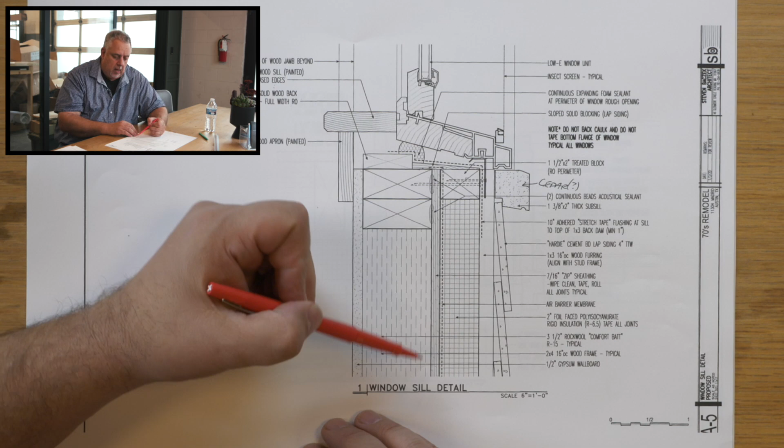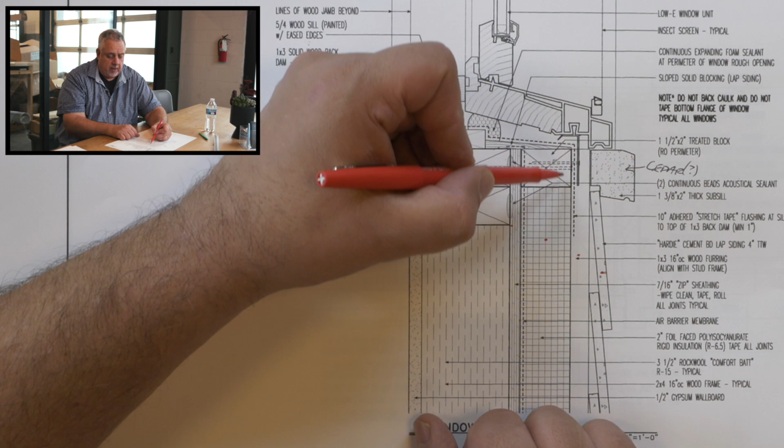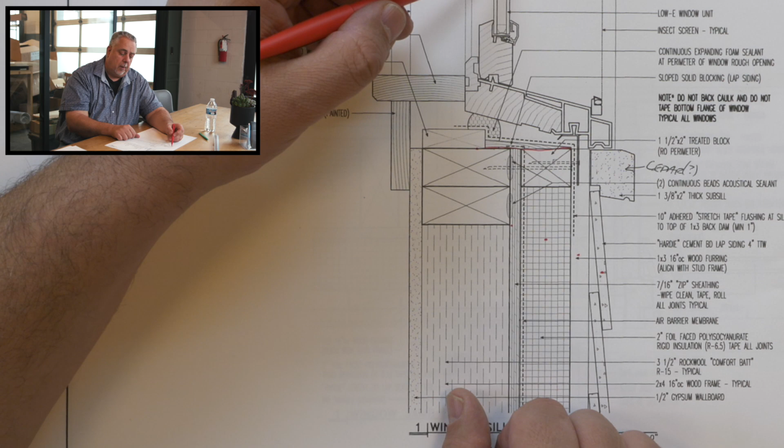From the other video, you notice that we have our ZIP wall, our 2 inches of foam, our airspace, and then our lap siding sitting on the outside of that. Nothing there has changed, but we're now cutting a hole in this wall and puncturing all of that. So for the time being, conceptually, all of our control layers stop there. But we need to connect those control layers from the punctured hole to the window, and do that ankle bone's connected to the knee bone, connected to the hip bone routine, and take those control layers through our window. So let's talk about how we did that.

First thing, as an architect, I've been doing this 27 years. For some that's a long time, for some maybe not, but it is what it is. What I can tell you about drawing details is it takes a while for an architect to get the confidence to understand exactly what they're building, right? So one of the things I pride myself on is I go out to the field and actually install some of these windows with the builder on different projects. I tell them I'll come out and we'll install the first 2 together. Now, you could say I'm doing that to help the builder, but I'm really not. Most of the builders I work with are extremely intelligent people. They're smart, they get it, they figure it out.

It's more about the collaborative effort. I have a certain set of skills, filters, and knowledge. The builder has a certain set of skills, filters, and knowledge. We don't see things exactly the same because we weren't trained to see things exactly the same. But our outcome needs to be exactly the same. So how do we do that? Well, we get all the tools and everything ready, I get out there, and we install a window together and walk through it step by step. Pretty much what I'm going to do right here and now with you guys.

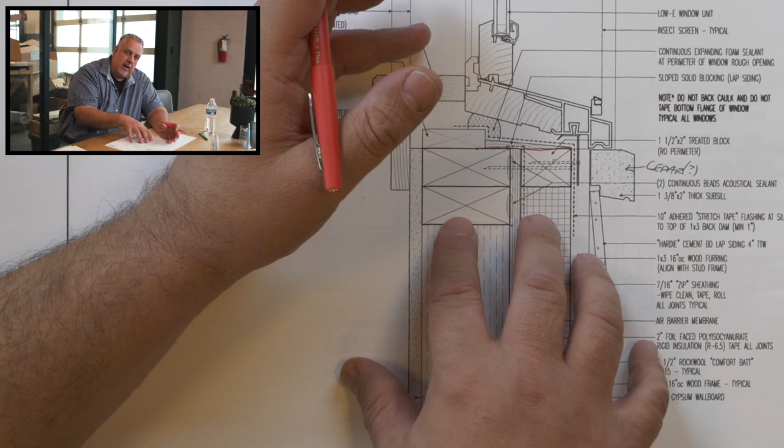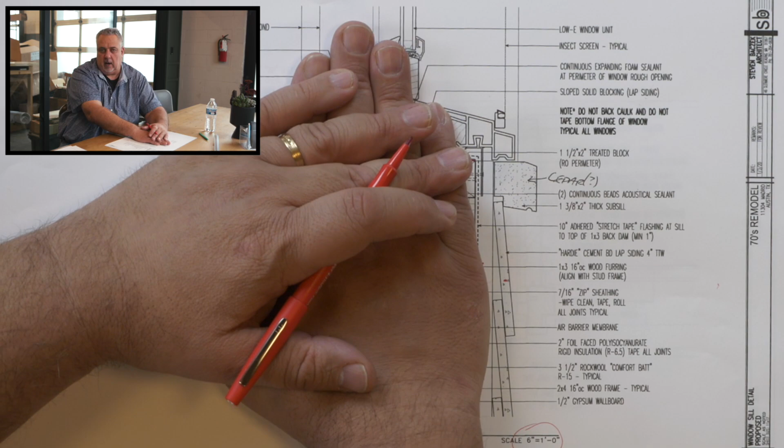Getting back to that one comment, it takes some years before you get the knowledge to be able to develop details. These details are drawn at 6 inches to a foot. That means half full scale, right? So these 2x4s here are 3/4 of an inch by 1 3/4 inches. They're half the size. If I just took this detail and doubled the size, it would be the actual life scale model of what we're doing. When you draw things at a scale of 6 inches, you need to understand all the different components because you get to see them all, right? You can't hide something in that dark line and just say, yeah, that's a piece of flashing, it's in there somewhere. No, you have to have the ability to draw the flashing.

So you need that understanding of what laps what, and how far it laps. I can't ask guys to put in 10 inches of flashing unless I've taken the time to measure and make sure that 10 inches of flashing goes from this point to that point, right? That way, what I'm asking for can be achieved. Imagine that. Drawings have a certain level of intent. Well, that intent needs to match a level of reality that, yeah, we can actually do that, right? So that's the start of a good detail.

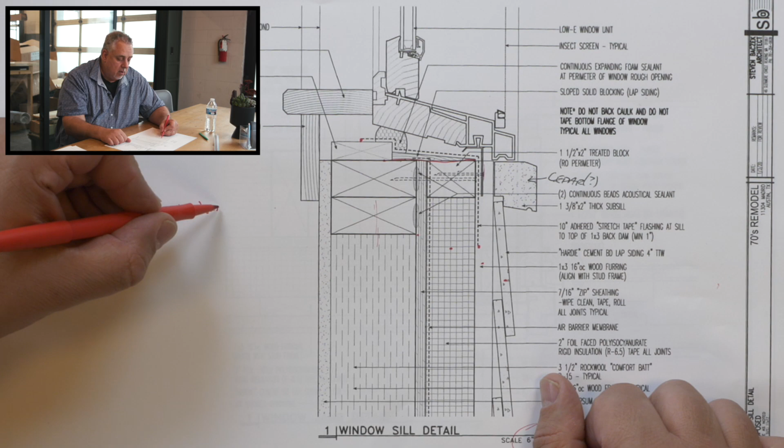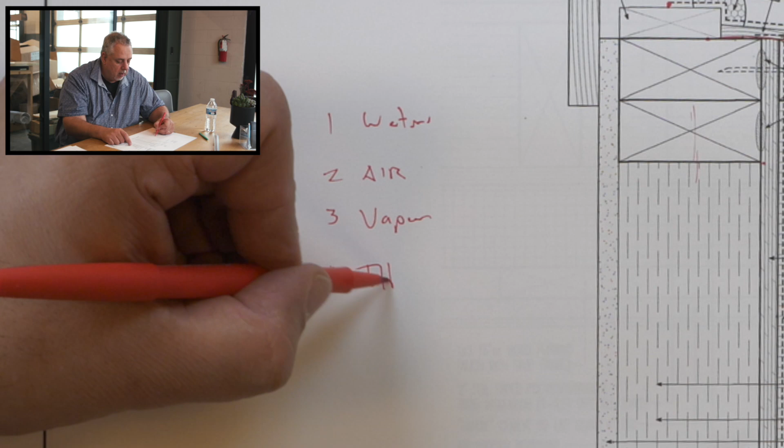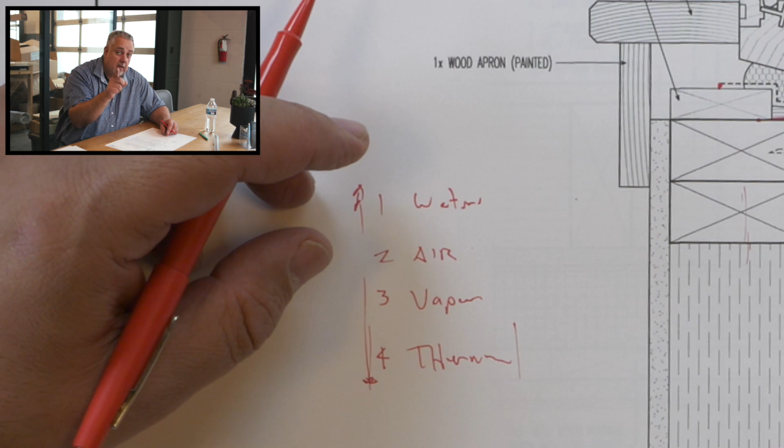Let's dive into this. We talked about those control layers. Again, quick review. 1, water. What are we going to say about water? If it don't last, it don't matter. 2, air. 3, vapor. And 4, thermal. In our order of importance. All right, quick quiz. What's the key about control layers? You guessed it. Continuity.

Is the key. Have to check that and make sure I spelled it right.

Well, wouldn't that be embarrassing, huh? Get caught on film and can't spell? I think I spelled it right. Anyways, just don't look so close.

You get the idea. Continuity is the key. All right, let's dive into these details. So, there's our two sills. We put those in, we bring our sheathing up, we have a couple beads of acoustical sealant here, and then our tape comes up, and then at the top of the zip, we bring a piece of tape that runs along the opening there and just seals off that joint.

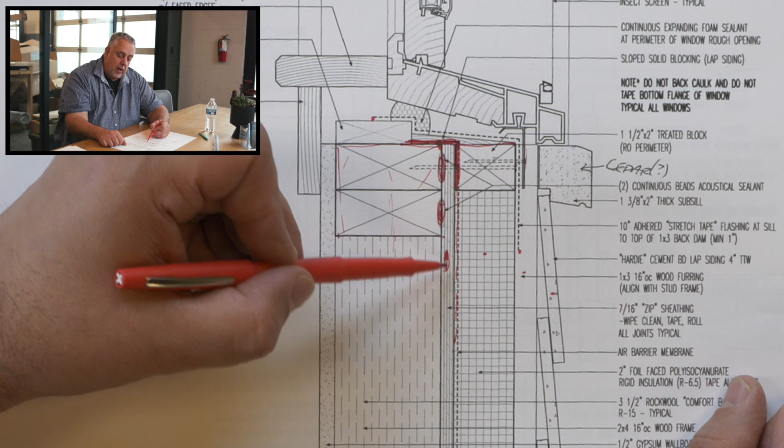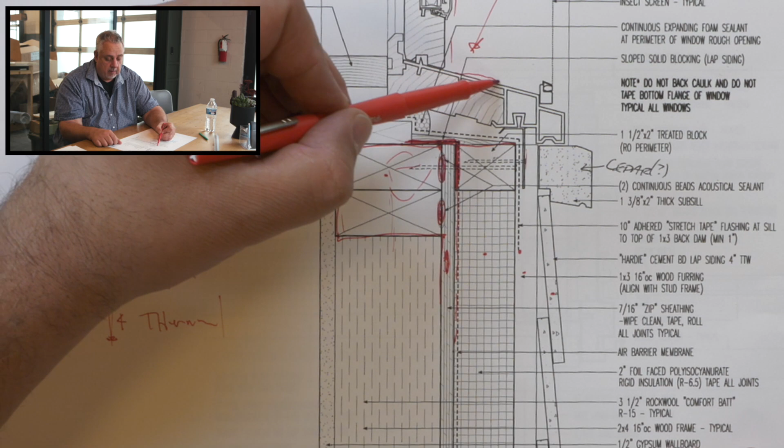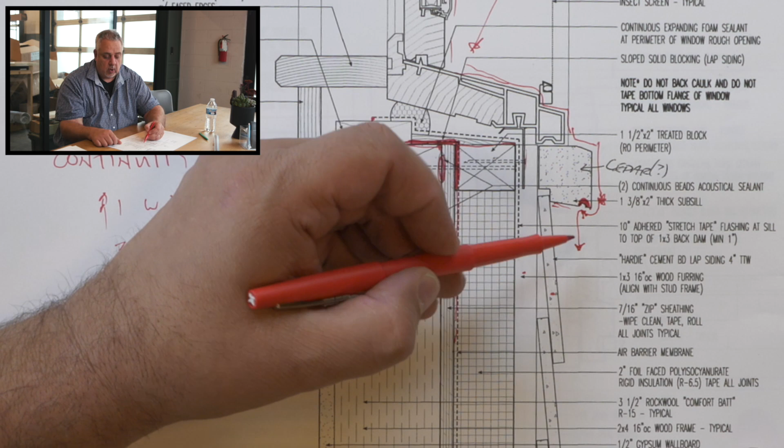Notice the little reglet here. This is a sill that you can purchase off the shelf, has the reglet cut in. That reglet is to stop water from turning the corner and going up. It forces the water to come to a bead and then drip. And it drips down and falls down my siding. Any water that goes up into my siding through capillarity, we have the drainage space inside there.

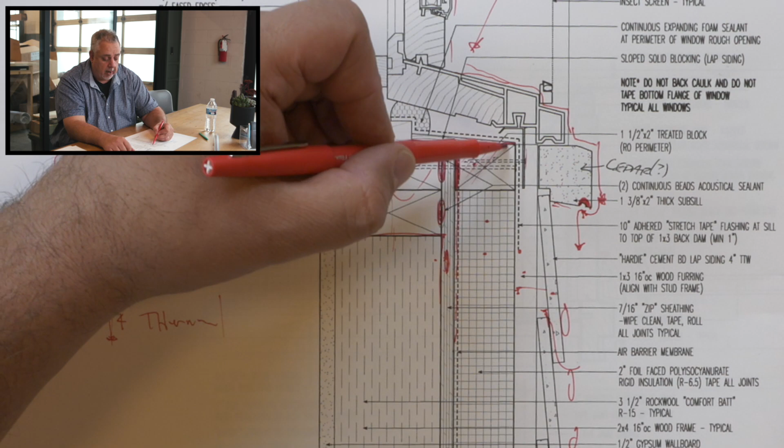So, we're putting the zip wall, we have our 2 inches of rigid insulation, we're adhering that to the wall, attaching that. We need to finish it off. Just like I finished off the bottom of the wall, we're putting a 2x2 buck. We're taking that 2x2 buck and we're screwing it all the way back to that top mud sill. And that finishes it off. It gives me a nice hard surface to now attach my window to.

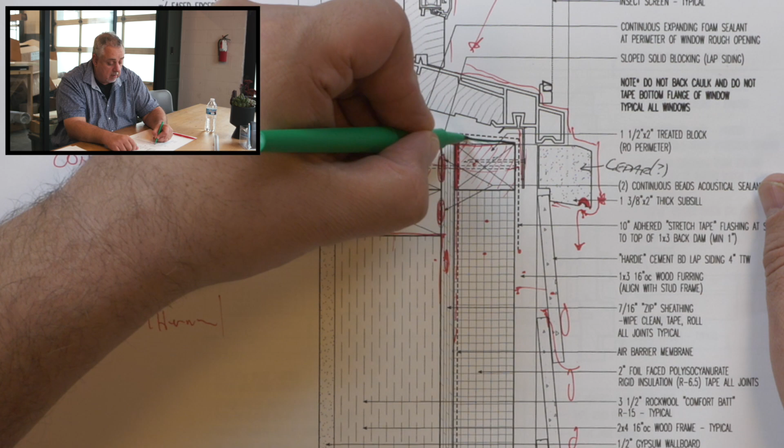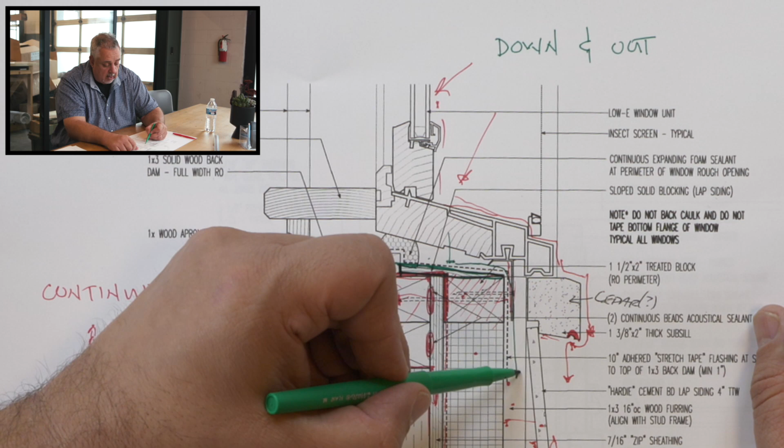On top of the buck, you notice here, we have a little slope piece of lap siding. Remember we talked a little earlier about what's a good strategy for water, and we talked about 2 words, down and out. All right? So if any water migrates into this cavity, it can now bleed and get into our drainage space and bleed out.

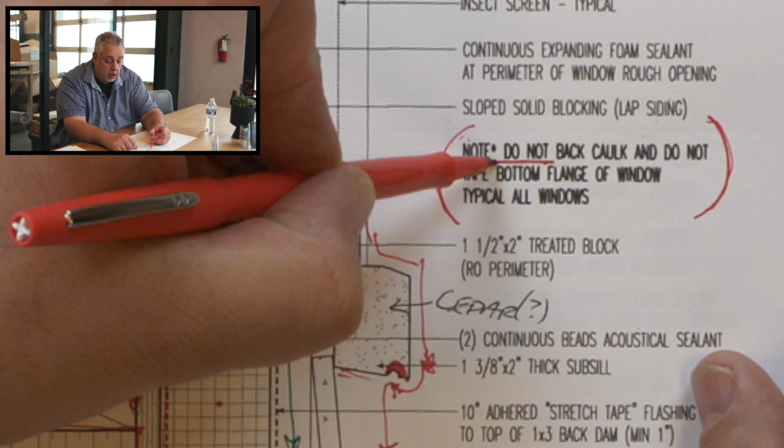Notice that there's no bead of sealant here at the nailing flange. And actually, not only did I omit it, but look what we have here. We have an actual note of what not to do. Do not back caulk and do not tape bottom flange of window. Typical all windows. Why? Because we want to have that ability for any moisture to migrate down into this drainage space and go down and out at the bottom of the wall system.

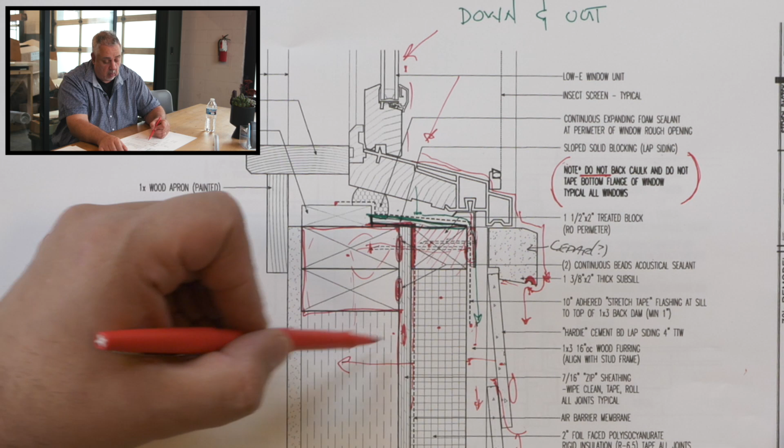So we took care of water there. Air, we talked about the air barrier. Vapor, we talked about that earlier. Our wall dries in this way and it dries out that way and dries down that way and up that way. Thermal, we have our 2 inches of rigid foam. We have the block here. On top of there, we have our slope. We have a piece of stretch tape here. The beauty of zip stretch tape is it has the ability to contour to surfaces.

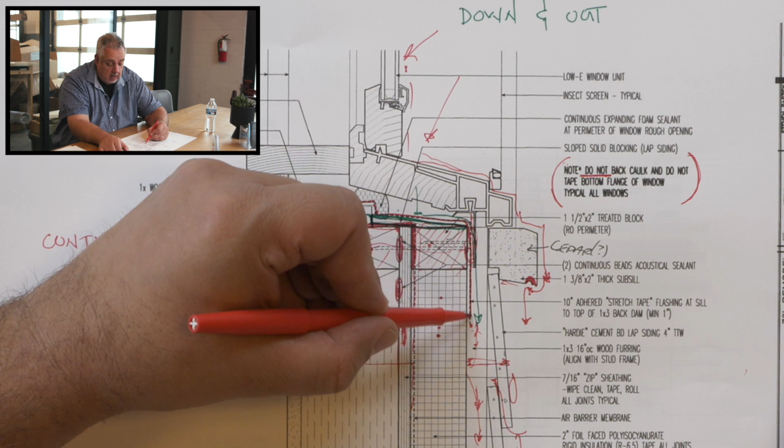So, doing this little song and dance on what I'm calling a 1x3 back dam here, right here, solid wood back dam, full width of the RO. What that suggests is any water that comes in, not only do I have a slope pushing it that way, if this wasn't sloped very well, it meets this back dam here, so water can't migrate up into the system any further. It has to fall and move out of the system that way.

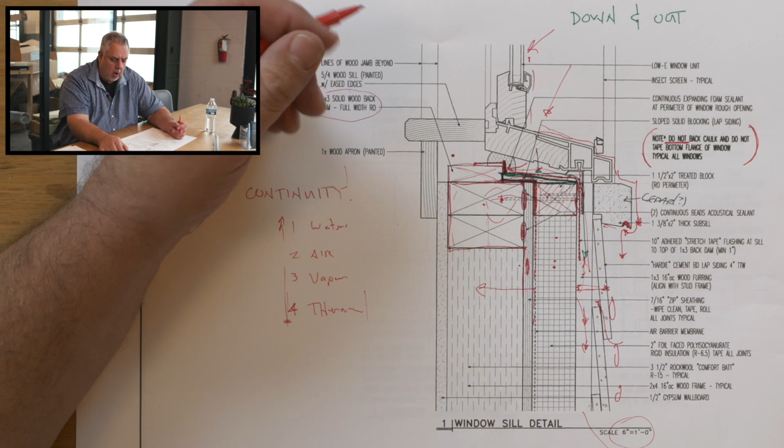So water's fully taken care of. Back dam, slope sill, stretch tape to drainage space. Water taken care of. Air. We have our air barrier continuity. Comes in there, the stretch tape goes over the top of that to the framing member. That's going to go around the 4 sides of the window and basically seal that up.

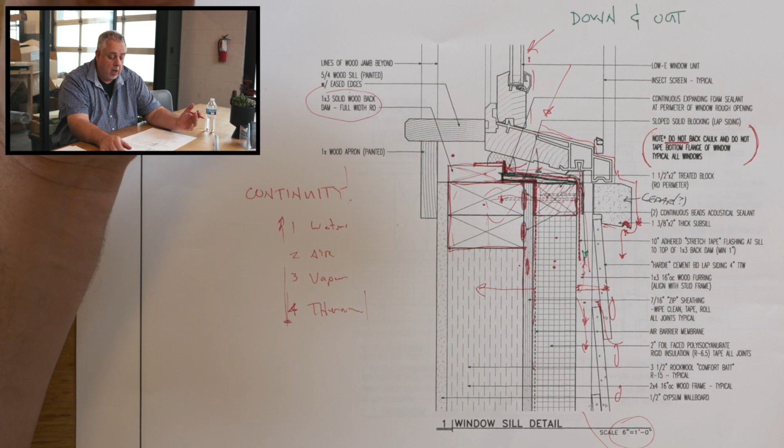We have, you can see here, after the window gets installed, we'll add some expanding foam in there. Now, the expanding foam is a choice that I make. I've done many houses. This is a pretty standard detail. I've taken houses all the way down to 0.5, 0.13, 0.16 air tightness levels using details like this.

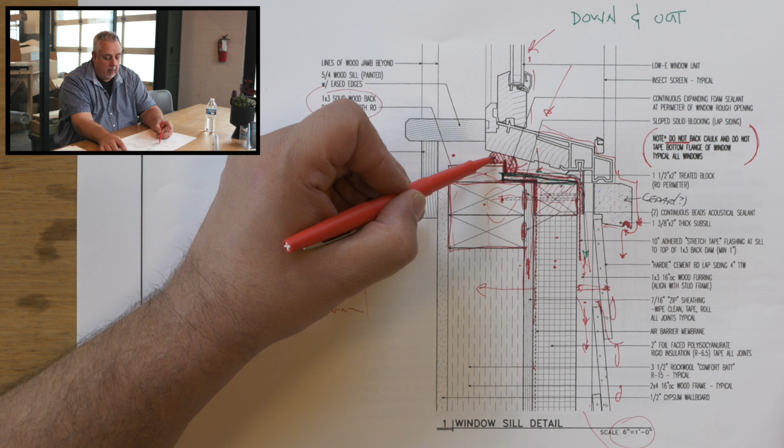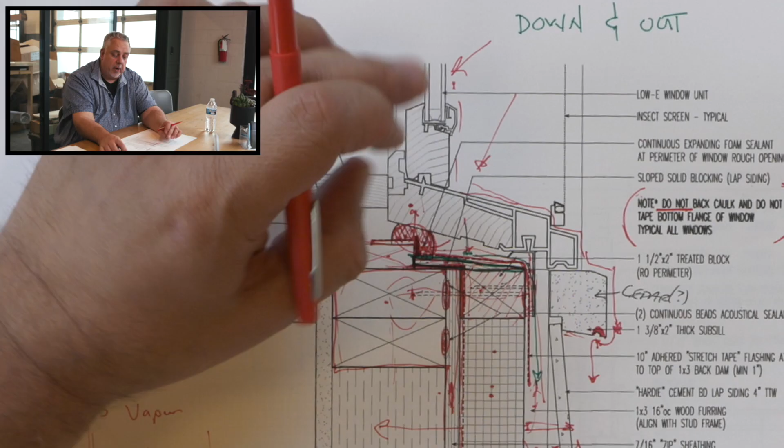So basically, we have our air barrier coming up, and then with the use of the expanding foam, that connects our frame structure to the window. And then it migrates up through the window, and we'll look at the jambs and head to see how that stuff gets integrated. But basically, I've connected my lower wall to the window now. We've punched that opening, and we have continuity across our water layer, our air control layer, vapor, and our thermal control layer across the sill. Let's move up into the wall.

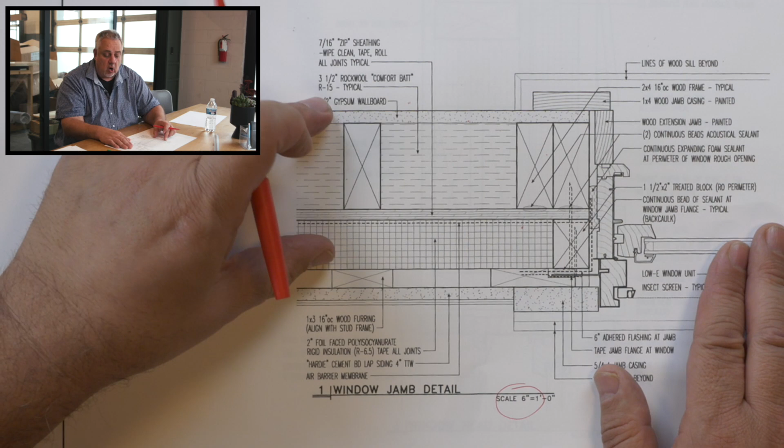Moving up to the jamb detail. The jamb detail, unlike the sill and head detail, is actually a plan detail, not a section detail, right? So this is a horizontal slice in the building rather than a vertical slice, which is what the sill and the head is. But this one's still drawn at 6-inch scale or half full-size scale. You can see the window there in the rough opening. This gives you a nice cross-section of the wall systems that we've been talking about in a plan view, right?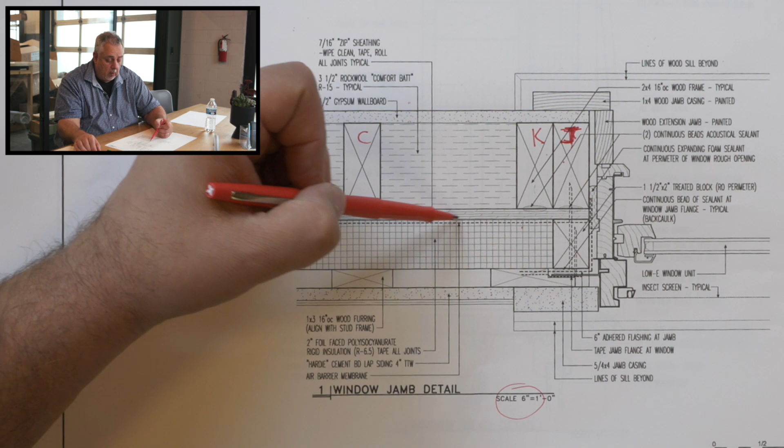You got your jack stud, sorry. For all you framers out there, I apologize, just talked a little too fast. We have our jack, we have our king, and we have our common stud there. We have our ZIP sheathing, air barrier comes in. We have our tape, turns the corner on there and seals that up to the opening. We have our 2x buck that gets attached to the jack stud, and then our window gets attached to the buck. We have our 2 inches of rigid insulation.

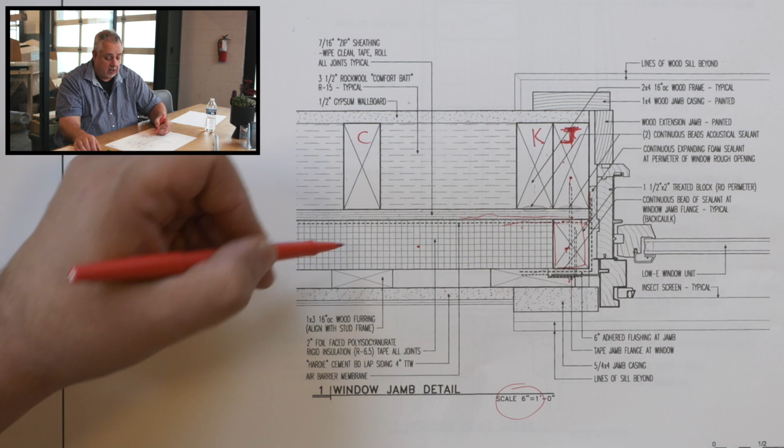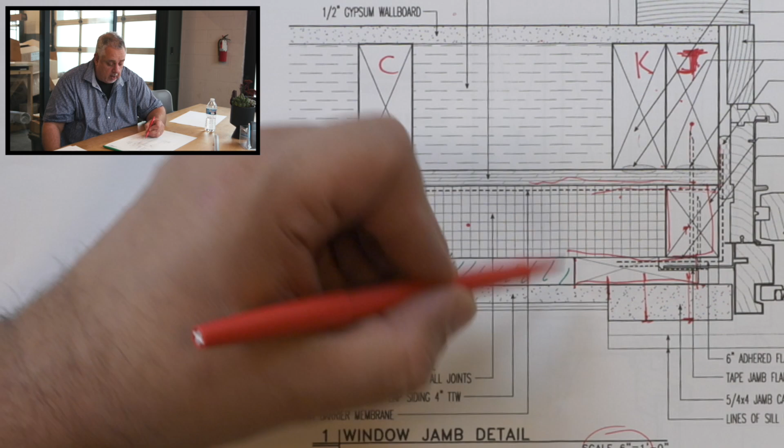Here you can see our 1x3 furring strips that create that airspace, right? That provides drainage vertically through our system. And notice here, we have our furring, but more importantly, the furring here, I split it so that we have the ability to nail our trim for our windows, but we can also catch the tail end of the siding in that furring strip. So that piece of furring is doing double duty. It's catching both of those systems for us, right?

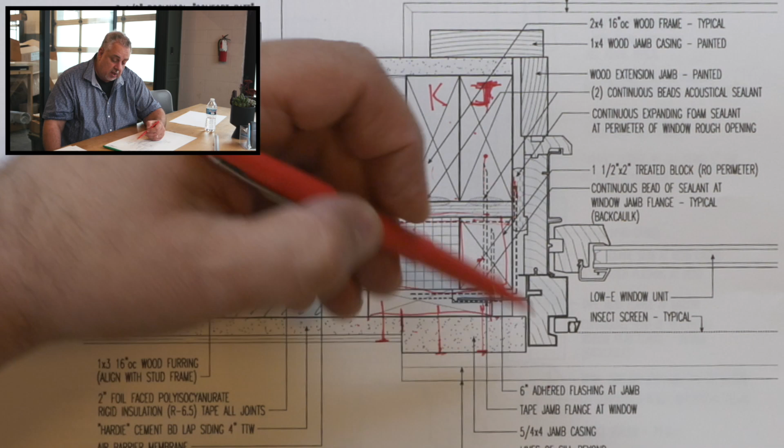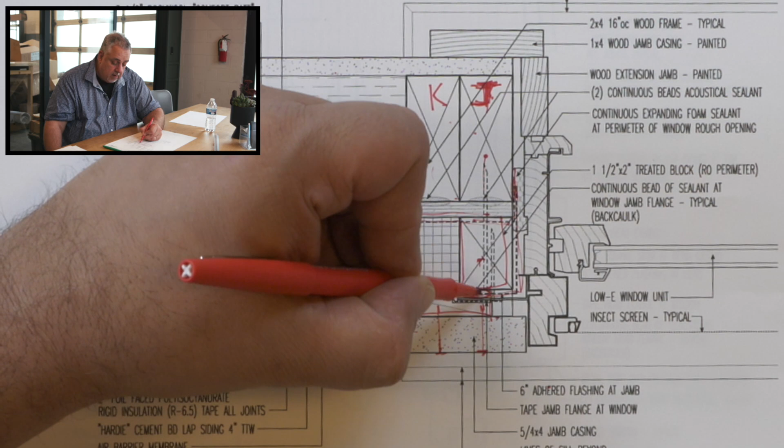As we migrate into the wall, we have a piece of flashing, 6-inch adhered flashing that basically turns the corner and flashes the opening. We put the window in there. The window gets sealed with a continuous bead of sealant at window jamb flange typical, basically back caulking the window right there. So that seals our window to the framing and maintains that continuity across the system, right? You can see here we have our level of expanding foam that also completes the air barrier across the system, connecting our rough frame to our window and providing that all-important word.

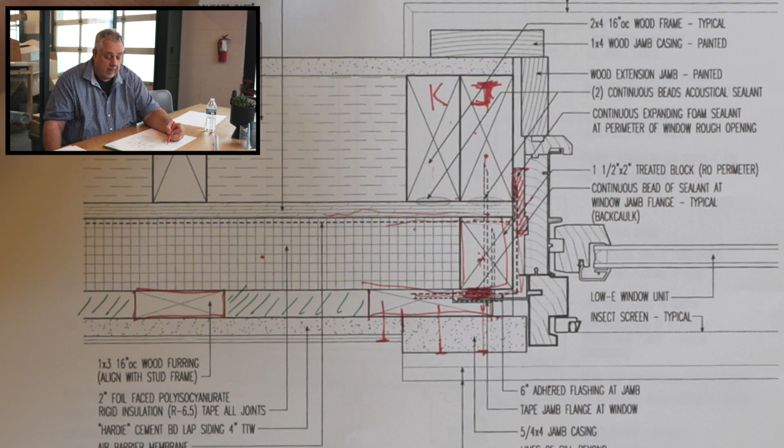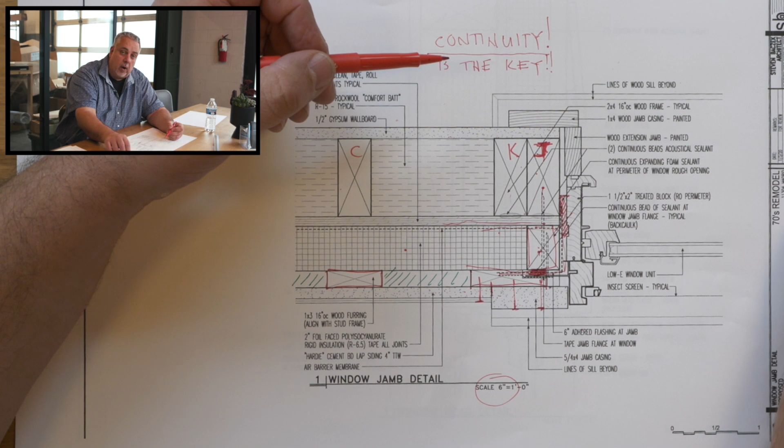I'm going to write it on every sheet for you. Continuity. Why? Because repeat after me. Continuity is the key. All right? No sense in doing something halfway. Might as well not even do it at all. All right. Pressing on.

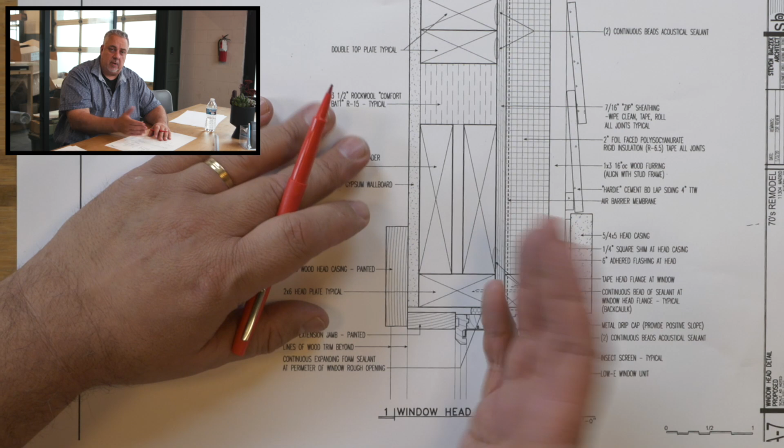We come to the head detail. The head detail, very similar to the sill detail. It's a section detail, although it looks pretty darn similar to the jamb detail, just rotated 90 degrees. So you'll see our window comes up. We have our framed wall. We have our header here with our plywood in the middle. We don't have an insulated header. Why? Because we have 2 inches of outboard outsulation here.

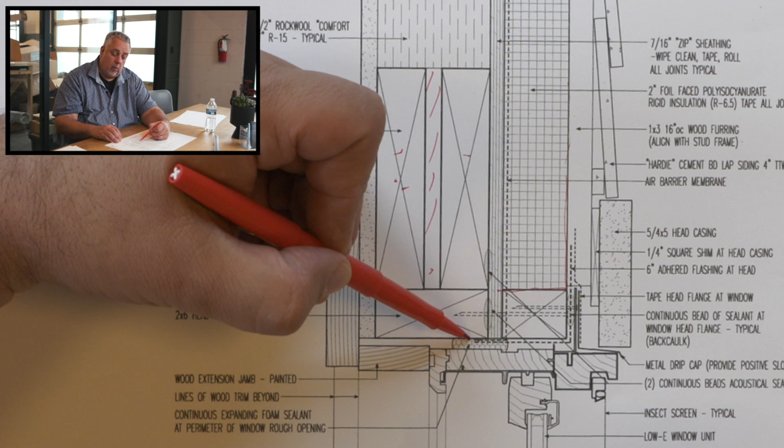We have our ZIP wall that connects from the top plate to the window framed opening, seals that all up. And remember, this goes up and then connects up into our roof system there. All right, so we maintain that continuity. Remember, let's say it again. Continuity is what?

Continuity is the key.

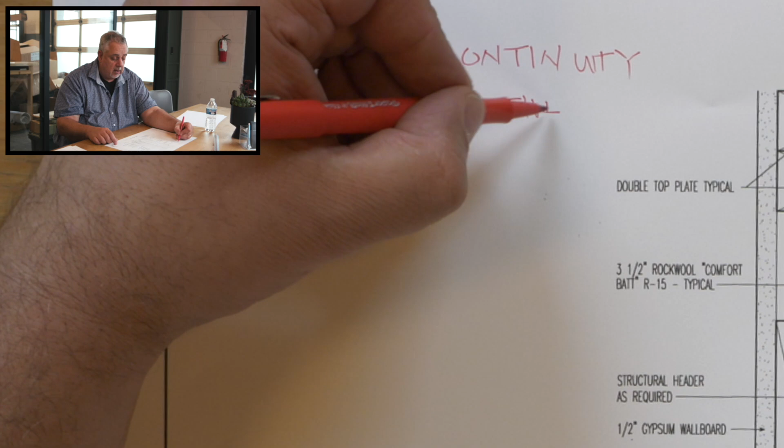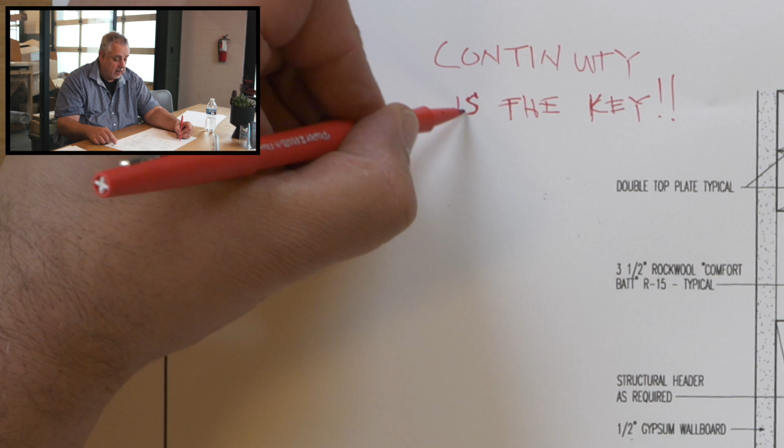For those of you out there that are musical minded, I think there's something to be said there for a nice building science song. Continuity is the key. I don't know. I'm not music minded, so we're going to leave it right there.

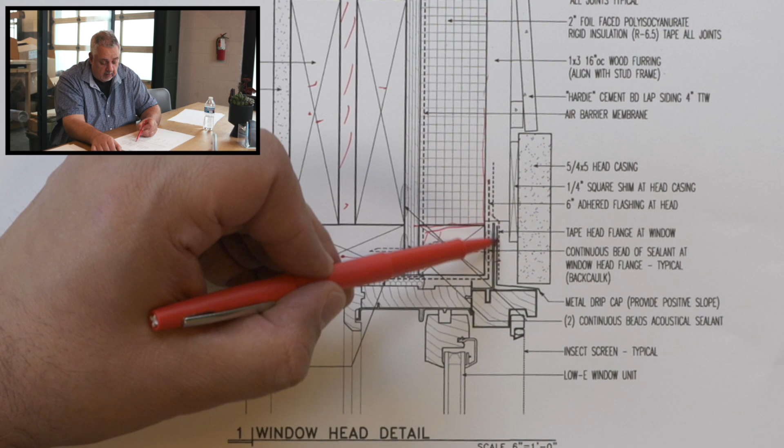All right, so let's jump back on this. We have our header, we have our head plate, we have our 2x2 buck. 2x2 buck gets attached to the framing, window gets attached to the buck, window gets properly flashed. We have a little head flashing here that kicks out. Notice we have a little joint here. It's an open joint. Notice we don't call for any caulking in there.

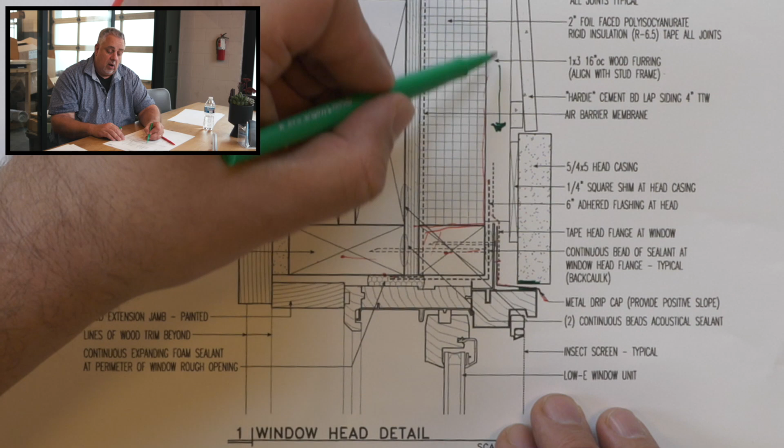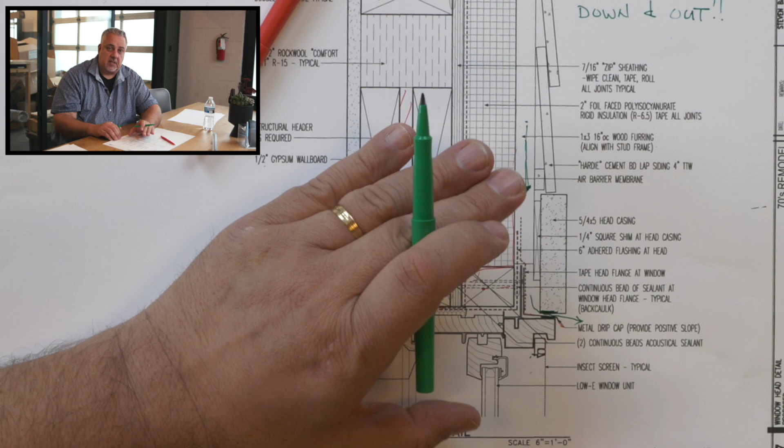Why? Well, remember, we have a drainage space. What are the 2 things that a drainage space needs? It needs to go down and out. All right, down and out. We're not building furniture here. We're building a wall assembly that has appropriate decision-making processes, right? We're not trying to close this up. We're not trying to seal it up.

Here's a very important lesson when it comes to tape and caulking, sealant, any of those. If you're going to learn one thing from me in all the videos that I do, this is probably the most important thing. The minute you break out a roll of tape, a caulk gun, a tube of sealant, don't ask yourself, what am I sealing out? Because that's pretty much assumed. You think you know what you're sealing out. But most importantly, ask yourself the question, what am I sealing in?

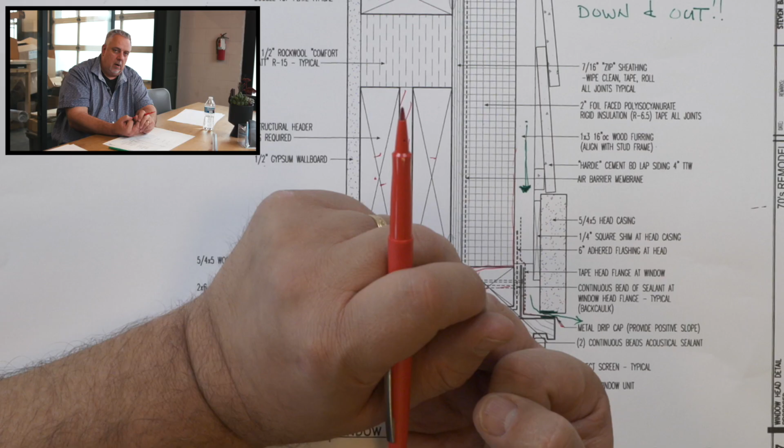Because if you think you can build a building without water getting in, God bless you. But I think you're about as naive as they come in that belief. Because water is going to get behind where you don't think water will get. And it needs a way to get out, right? So, down and out. Water's going to get behind this siding. It's getting in there. Having some little open air gaps, all that does is promote drying, right?

What's the basic drying equation? Things are okay if they get wet. As long as they have the ability to dry more than they get wet, life is good. When things get wet, but don't have the ability to dry, problems, right? We always want to be in this arena, not that arena. It's okay if things get wet, as long as they dry more.

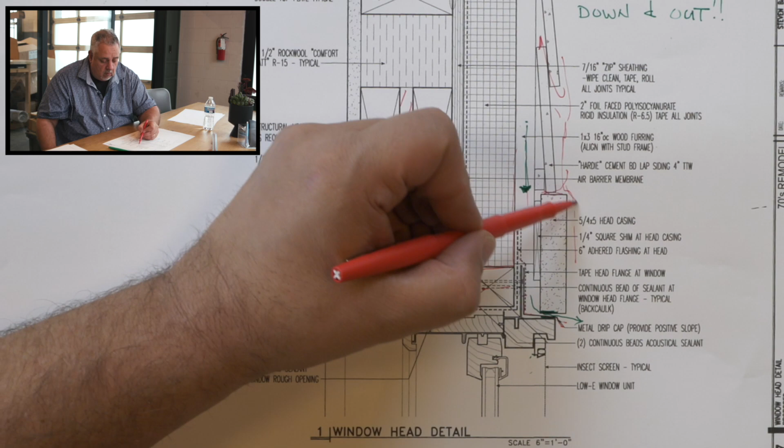So, let's look at this. We have our water coming out. Our bulk water management runs down the outside here. It drips off the window. Our window manufacturer did a fine job, handles all the water management internally in the manufacturing of the window system.

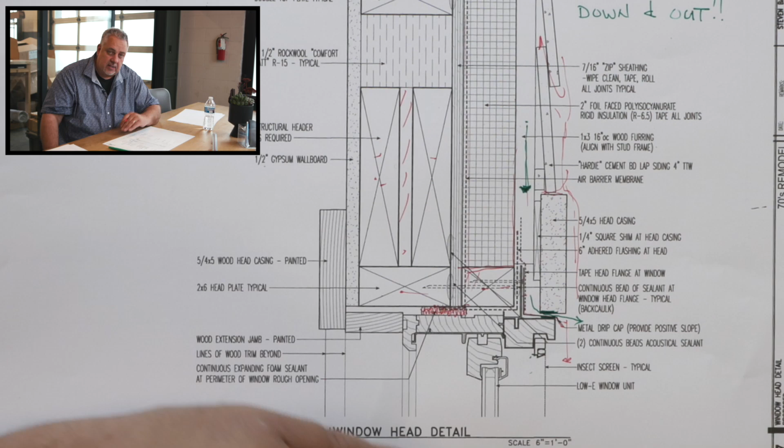Our air barrier continuity, we brought that in. We have our expanding foam sealant here that goes around 4 sides of the window, basically sealing the window to my framing. Framing's attached to my Zip. Zip goes up and over the building. I've effectively built that hot air balloon in concept, right?

How effective? Well, part of that comes from working with good builders and both of us being on the same page. It was a real treat this afternoon. I got to sit down with the framer and Matt. We reviewed these details. The 20 minutes that I got to spend with the framer and Matt talking about drawings and marking them up actually became kind of the click of, hey, let's do a video about this. But in talking with the framer, making sure we're all on the same page, that's how we get to that level of success, when we're all pushing in the same direction, all right?

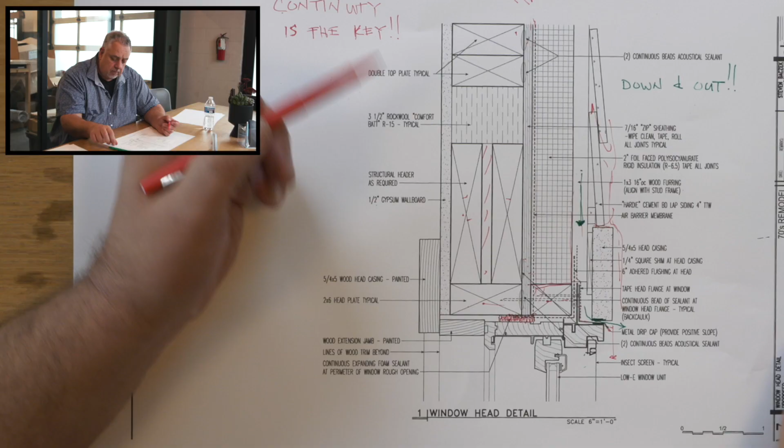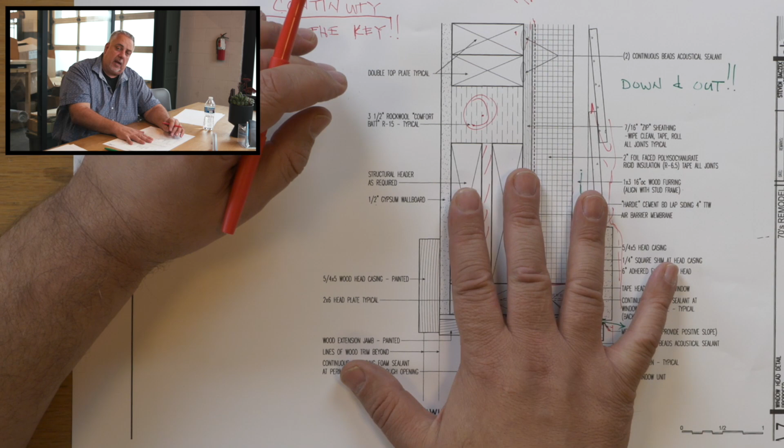So, our insulation, we have some limited rock wool inside there. We have our 2 inches on the outside, our drainage space. It's all taken care of. The window's installed. We've maintained continuity through our whole system. We have our 4 control layers being taken care of, even at all of the punched openings, at the windows. Continuity is the key, and it is maintained. And we have a successful system.